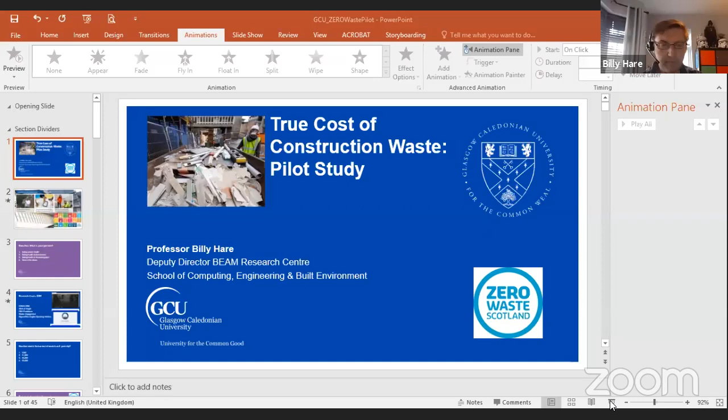Thank you, David, and thank you for that introduction. As David has mentioned, I'm an academic from Glasgow Caledonian University, and I want to speak to you today regarding research that I did just before the pandemic-induced lockdown. It completed just around about January, February this year, and it relates to - if I just share my screen and bring up the PowerPoint presentation for you - it relates to something around construction waste, and it was researched to try and do an update study of the true cost of materials wastage in construction projects.

Now, some of you on the call today may know me from my more substantive research area, which David alluded to there, which is on the management of health and safety risks, which I'll say a little more about in a moment. But for today, this is just another area of interest to me, which has been for a number of years, but I don't get the time to do as much research and other work in this area - the reduction of construction materials wastage on construction projects.

So as David says, I work as an academic at Glasgow Caledonian University. I'm Deputy Director of what's called the BEAM Research Centre. That stands for Built Environment and Asset Management Research Centre. And that's within the School of Computing, Engineering and Built Environment.

Now, the webinar today is billed as, I think, something along the lines of improving your waste management on construction projects. But just to be clear, what I want to report today is on this project regarding how we went about identifying the true cost of construction waste. But along the way, I've applied a little bit of my health and safety insights. And the phrase that I like to use is identifying the root cause of the waste rather than just managing the waste as it arrives in the skip. I'll say a little bit more about that later.

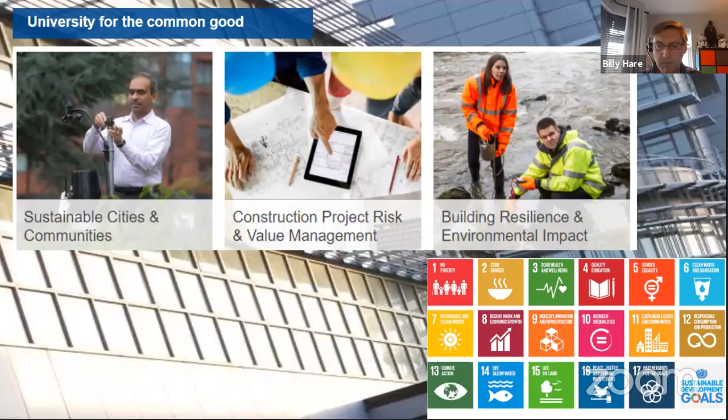Which SDG do you and your research talk to? I can tell you off the top of my head immediately that sustainable goal number 3, good health and well-being, which is the health side of health and safety, and goal number 8, decent work and economic growth. Decent work includes safe work, so there you go. Number 8 and number 3, that's our health and safety. But as I said, today I'm not saying too much about that work. We're looking at what might be termed under goal number 12, responsible consumption and production.

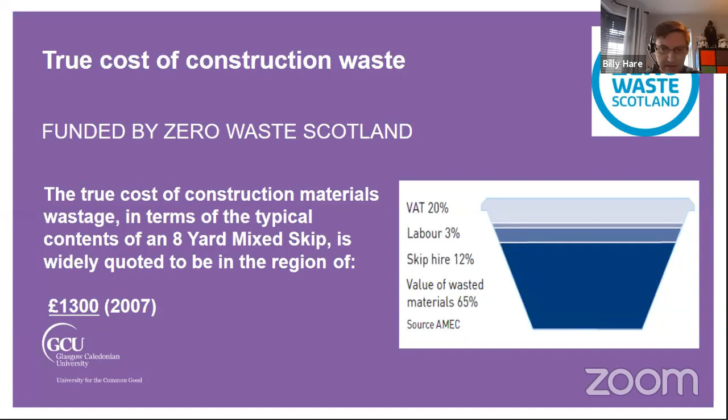The date is significant, isn't it - it's just prior to the 2008 global recession, and we've had various things happen in between. So we were asked, is it still the case? Is it still 65% the purchase value of the waste - what you as a contractor paid for it - the skip hire cost being 12%, the labour cost to put the waste in the skip, and VAT at 20%. Although when this work was done in 2007, I'm sure the VAT level was 15 or 17.5%, so there's been some variation in the VAT figure as well.

So some waste tools I came across doing this research, just for your information if you're not already aware of them. The BRE SmartWaste Tool is probably the most well known, and there's a link to it. What I find with it though, if you talk in health and safety terms, is that it's very much looking at the scene of the accident and doesn't do too much, in my opinion, to backtrack through the causation or the incident of waste going in the skip. The causation model doesn't feature too much in it. I may be wrong because I've not seen more recent versions, which you have to subscribe to see, so it may have been updated since I last looked at it.

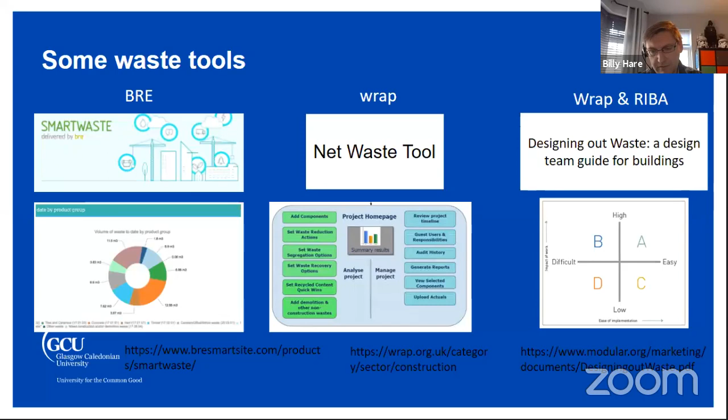WRAP also have the Net Waste Tool, although when I looked at it recently I couldn't find the tool - I'm not sure if it still exists in that format, but there's plenty of guidance on that as well. WRAP, in conjunction with RIBA, have also produced not so much a tool but a working method for designers to design out waste from the start, using techniques such as the one on the screen there - is it high impact, is it low difficulty, then that's an easy one to implement; if it's high impact but difficult to implement, it might be more or less achievable. So tools like that and others are in that guide, and the links are there for your information.

But my take on this is that they've not really looked at it like site waste management plans do. They look at the waste as it arises, but to what extent do they go beyond that to the reasons why the waste is produced? And that's where I've got the title there: Find the Root Cause of the Waste.

We wanted to also update that figure of £1,300, which incidentally was based on one site, one skip, in 2007 - so it's not exactly a large database or large sample to take it from. We have, in fact, undertaken the work that I'm going to show you today as a pilot study, but using 3 sites, so that's already 3 times the sample size of the original work. The other thing I want to show you is the methods that were used as well.

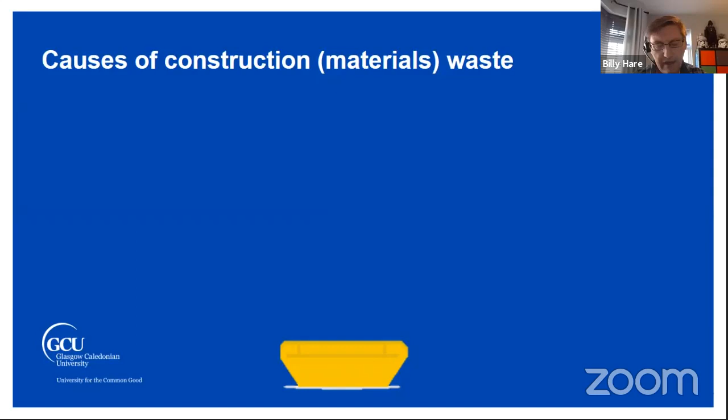So what I've got here is just a summary of those root cause factors that might result in waste being in the skip. So you might have design and client influence - I won't go through every one of them, but things like buildability issues or the client changing their minds.

It wouldn't be the first time when I worked on construction sites where we had to pull down a blockwork wall because the client changed their mind about its position. So unless you find out the source of that, how can you improve matters?

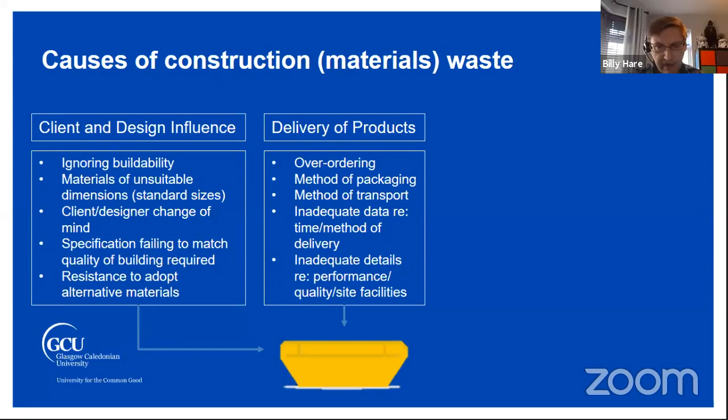We then got to things like delivery or procurement issues, such as possibly over-ordering. From a site-based background, it's always better to have too much than too little, but that's another factor that can result in waste in the skip, as well as transportation issues and other issues around packaging. Then eventually you get to site management practices, such as poor storage and transportation within the site that might result in breakages, damages, or losses.

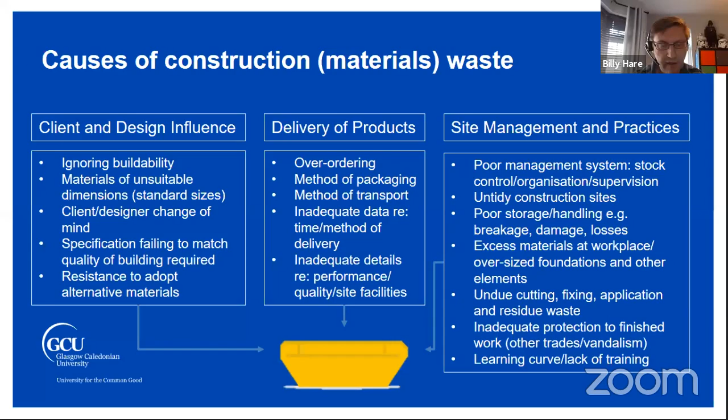So these are all things that are important in trying to track down the source of why your waste is in the skip. For the work we did, I employed a researcher, funded to have quite a boring existence on the site at the skip, logging all the information. They had a tablet we purchased, and we used a very simple spreadsheet with drop-down lists for various options, which I'll come to in a moment.

The researcher was permanently on site for sites 1 and 3, because the skips in those sites - 8-yard mixed waste skips - filled up quite quickly. On site 2, it took far longer to fill the skip, which will become evident when we look at the data, so there were intermittent visits from the researcher.

We had to consider risk assessment and safety issues, so the researcher had site inductions. I specifically asked that we did not have sites that incorporated a chute system, for fear of being struck by items from above. We did accept sites using forklifts to load the skip, because we had an experienced researcher who'd worked on construction sites.

On one of the sites, we also used a GoPro camera to test how useful a camera could be to collect this data, rather than just someone standing at the skip on a permanent basis.

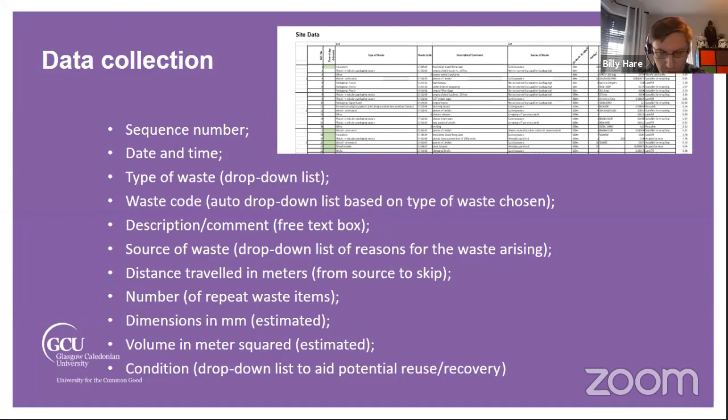We had, again, a drop-down list with definitions, such as good as new, right down to useless, put it in landfill. Here are just some examples of those drop-down lists that I thought you might find interesting.

That's typical of the construction waste definitions: insulation, concrete, bricks, along with their code, which comes up automatically when you choose that option in the drop-down.

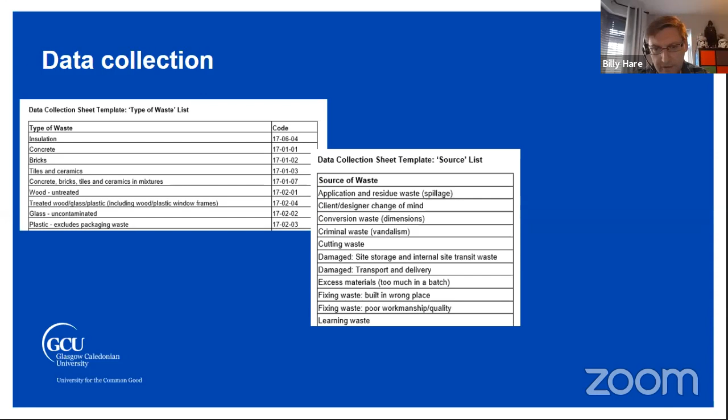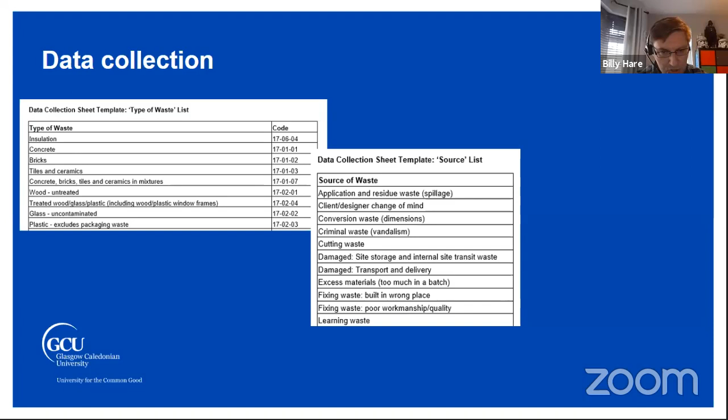The all-important source - things like cutting waste, damage, learning waste if it's a new product - these are all things here. But as I say, I want to manage your expectations: very few of these were identified, and it was basically a low-level assessment of why the waste has arisen. But even that is refreshing compared to what would normally happen, which would be identifying which subcontractor produced the waste and just bashing the subcontractor until they had less waste.

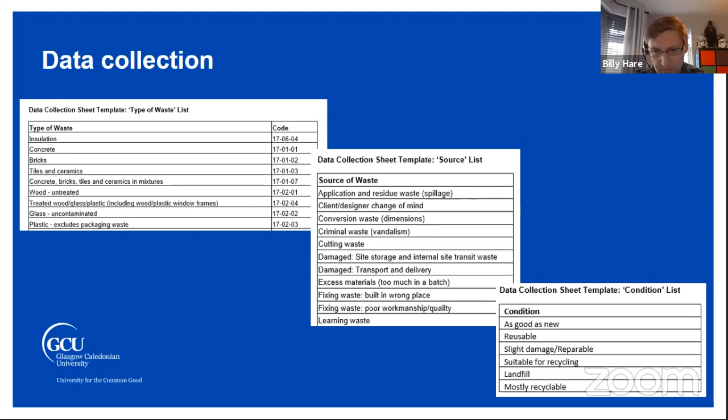The last one there was that condition, and there were definitions of what as good as new meant, what reusable meant, slightly damaged, or put it to landfill, for example.

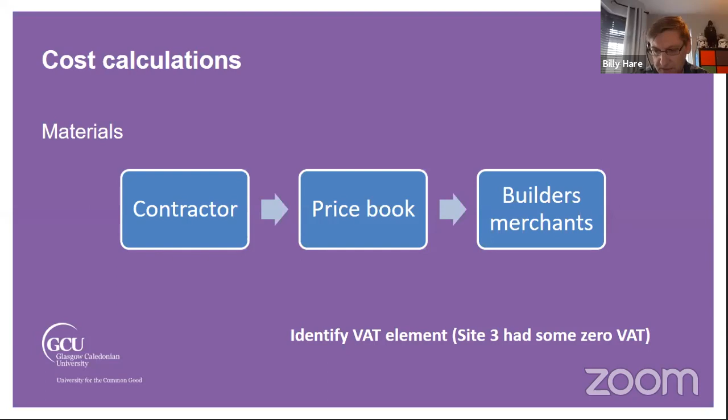In terms of the cost calculations, we got costs in some occasions from the contractor, what they had purchased the materials for. If we didn't have that, we would go to a typical price book, such as Spons, or the last option was maybe builders' merchants' cost information. In one of the sites, we had zero VAT because it was a house building site, which I'll come to more information on in a moment.

To calculate the labour costs, we had the hourly rates and the average time. We researched how long it would take to carry the waste to the skip, which we calculated to be on average 3 kilometres per hour, 2 kilometres in a hoist, and 8 kilometres in a forklift. That equates to roughly 5 miles an hour, which is the typical forklift speed limit on a site.

We also identified what it might cost to fix problems. When things go wrong, the reason the waste is in the skip might be that it was installed incorrectly or was damaged, so there was a cost allocated to fixing that problem. We also had, on some occasions, wrongly specified materials chucked in the skip, which has cost implications as well.

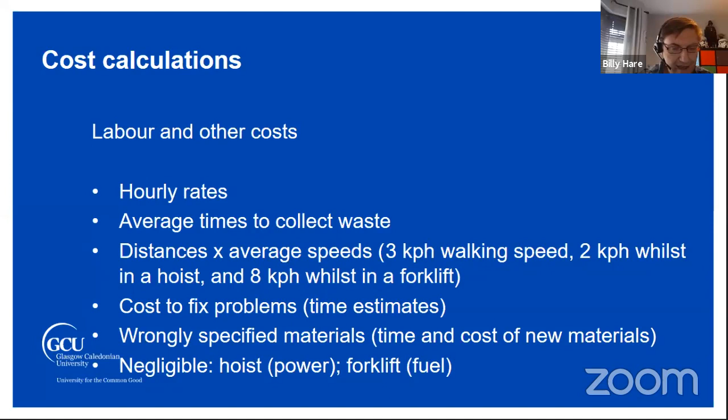Other things we identified but were negligible were the power for the hoist and the fuel for the forklift. We did not include the hire costs for the hoist and forklift because we decided you need that equipment whether you're producing the waste or not.

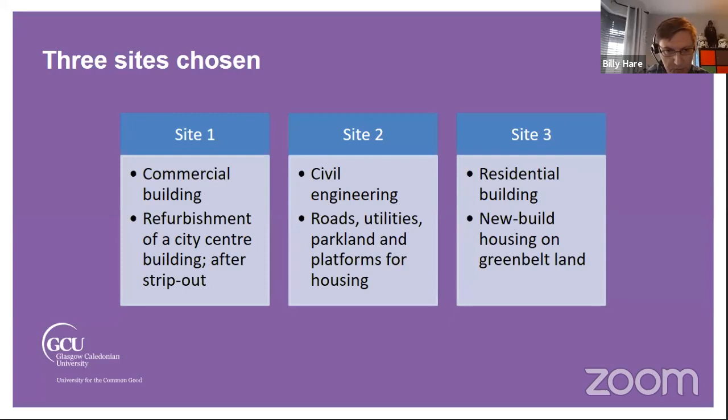The 3 sites were basically a commercial building site, a refurbishment, a civil engineering site, and a new build housing site on Greenbelt. These were specifically chosen from the various options we had, so we had a good mix of different types of site. Site 1 included the use of the GoPro camera.

We also approached some site waste management contractors because we thought we could possibly tip one of the skips out at the waste transfer station and collect the data that way. That might have been a more cost-effective method, but after 3 attempts at 3 different waste contractors, we gave up because they were too interested in productivity and could not, even with a £1,000 incentive, give us enough time to analyse the waste as it came from the site into the waste transfer station. That tells you a little bit about the priorities of our waste management sector here in Scotland.

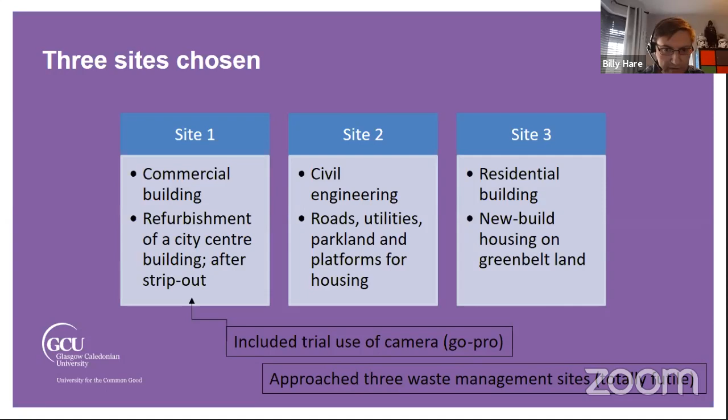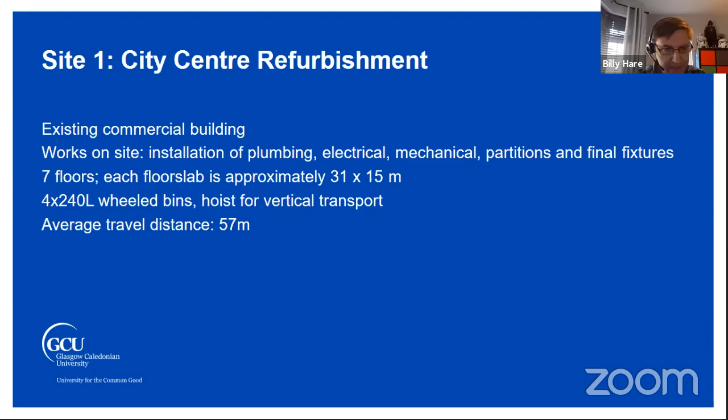So let's look at the results. Site 1 was a city centre refurbishment. There's some information on that. A soft strip had already been undertaken, but there were still elements being stripped out as the new plasterboard, fixings, and partitions were being installed. 7 floors, 4 240-litre wheelie bins using the hoist to transport waste down to the skip.

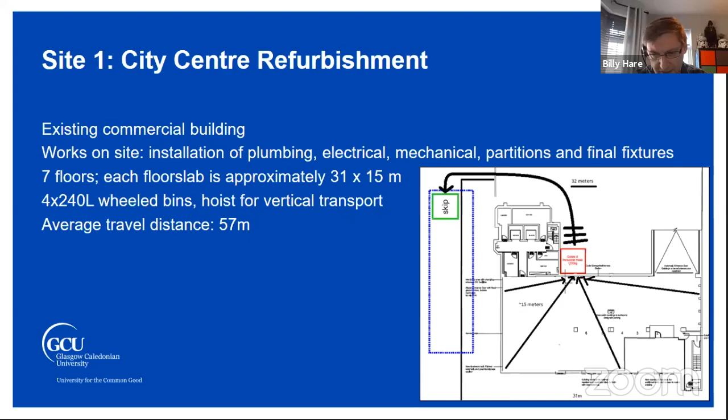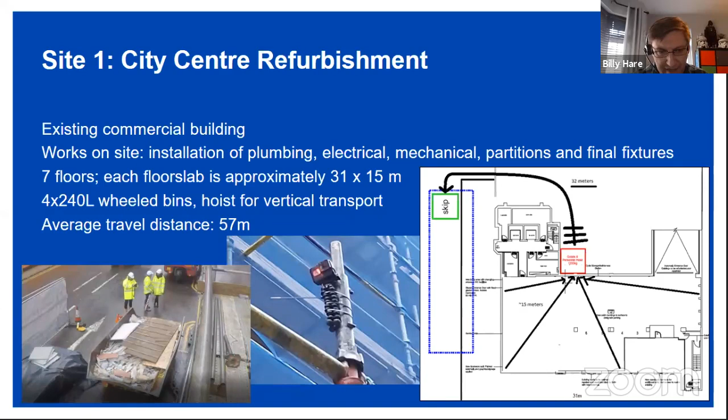On the slide there's a draft drawing by the researcher identifying a typical floor slab and the route taken to the skip, which is on the left-hand side. The GoPro camera was on the scaffold across from the skip, and that's the picture of the skip there, which has been analysed. This was filled within half a day, a very fast-moving site, which gave us data really quickly.

The waste was calculated in terms of volumes. Based on the type of work being done, the greatest amount of waste came from offcuts of plasterboard. The demolition waste was mostly other types of plasterboard and timber. Timber accounted for 14% of the waste, and metals 10%.

When we put the purchase cost against that using our method, it was £343 worth of plasterboard that was offcut. Timber, £519, and metals, £43. So total purchase cost of £905.

When you add on the other costs, the labour costs and the skip hire, there was a permit cost as well. That came out at approximately £1,351, which was almost bang on the current figure of £1,300.

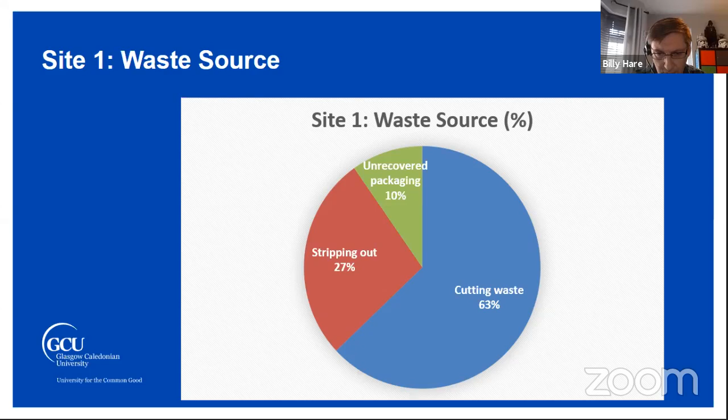Then you start to look at the waste source. So what is the waste source? The cutting waste was accountable for 63% of the waste in the skip, mostly plasterboard, but also some of the timber and metals were down to cutting waste.

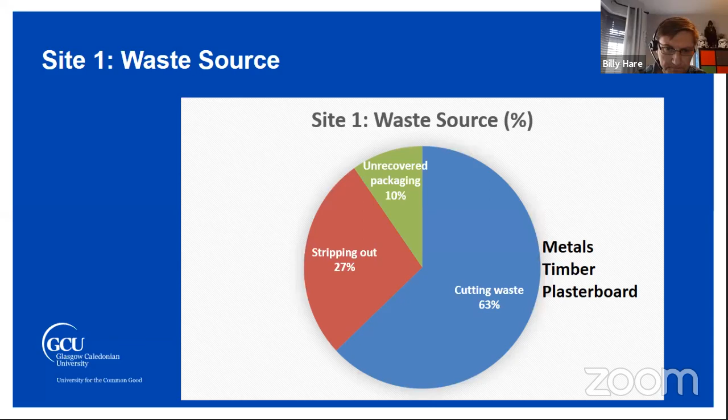When looking at possible solutions, we said to the contractor they might want to consider things like digital scanning, the use of digital technologies, and even prefabrication. I can appreciate that for an existing building this is difficult, but digital scanning these days can allow more accurate assessments of dimensions, and standardization of dimensions is key to reducing the amount of cutting waste. That's just one example of how we assisted with that particular site.

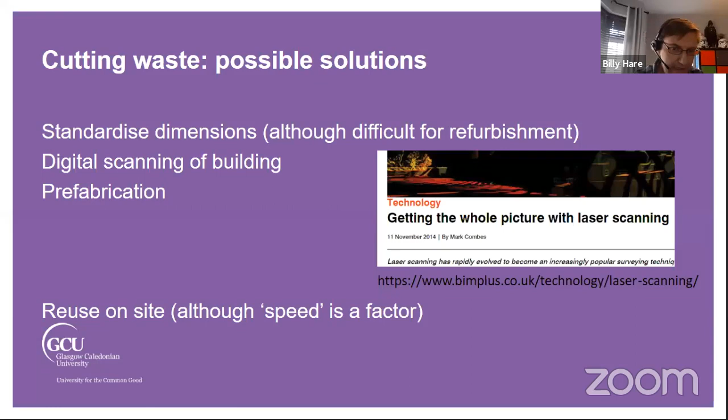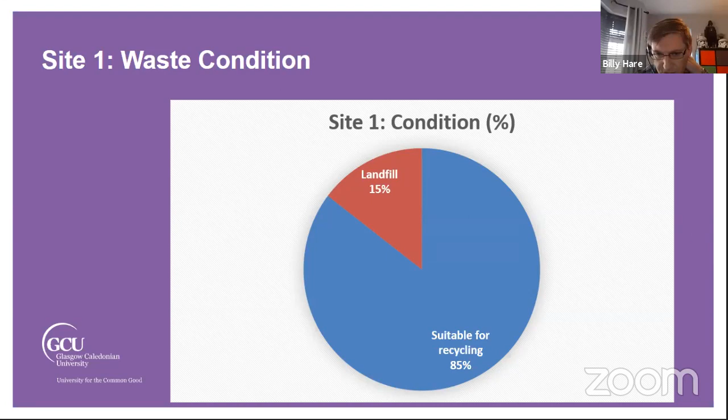The waste condition analysis found that most of the waste was suitable for recycling. We don't know what happened to the skip once it goes to the waste contractor's transfer station, so possibly it was recycled, but with a mixed waste skip, we are unsure what's happening with that waste. We identified that 15%, mostly contaminated or unsuitable for recycling, was in that skip. So there was large scope for recycling in that particular skip.

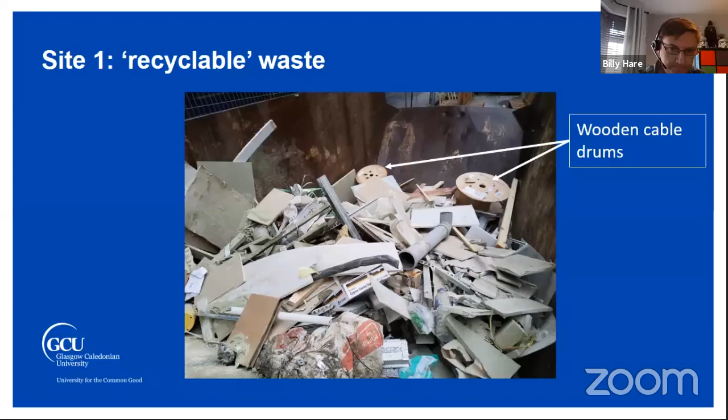So you really need someone there on the site.

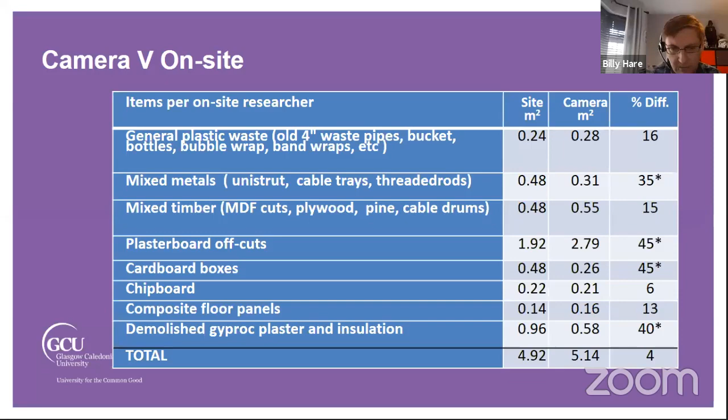If I move to site 2, this was a civil engineering site, a very large site, mostly groundworks going on, and not much call for mixed waste going into the mixed waste skip. There was a forklift in operation. We also had a dedicated supervisor at the waste compound, and there were 4 segregation skips.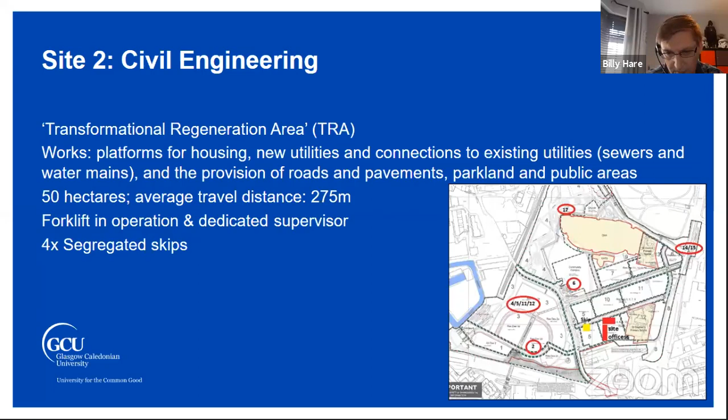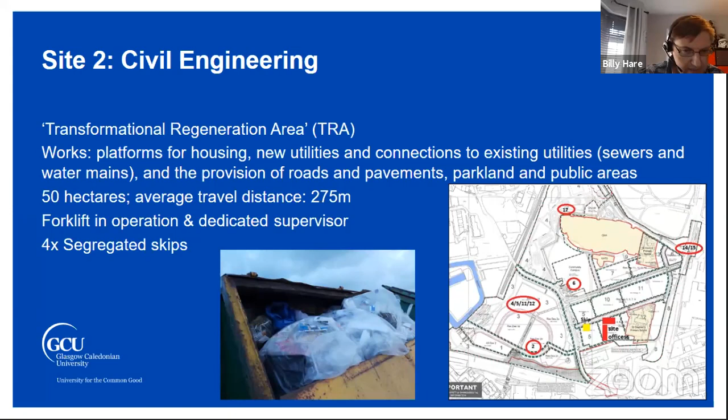As it turned out, the main amount of waste going into this skip for the civil engineering contractor was actually from the welfare units. The layout of the site shows the site offices in red and the skip compound in yellow, with the red circle showing the areas where the waste was coming from, but the vast majority was coming from the site welfare facility. As you can see from the photograph, the majority of the waste in the skip was from plastic bags, so although it was mixed waste, it was mostly from the welfare facility, reflected in the pie chart.

The welfare waste was 91%. There was other stuff such as expanding foam, something I've called office waste, which included a laptop bag and drawings discarded in the skip, and an element of packaging, although some of that packaging was the type that could be reused, it was put in the skip anyway.

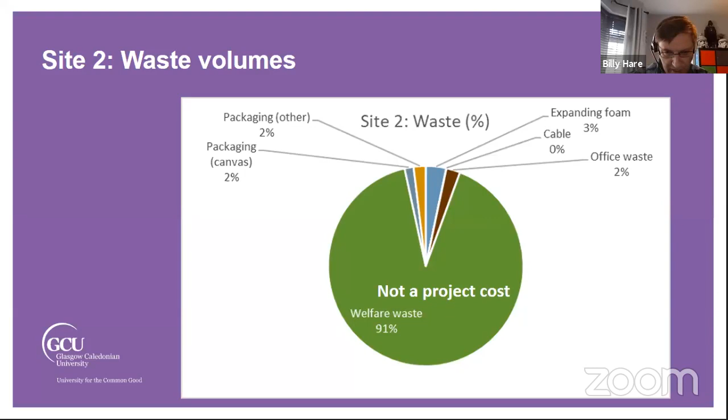The welfare waste we decided was not a project cost, so things like empty cans and crisp packets were not purchased by the contractor, so we didn't consider it project waste. The office waste we did, and we put prices on that, and the expanding foam and some of the packaging that could have been reused was included there. So a rather smaller figure in terms of materials cost of £331.

What I will say also is that the supervisor saved in the region of about £240 worth of waste going to the mixed skip by removing it from the mixed waste skip and putting it into the segregated skips. So this was mostly timber, plastic and packaging.

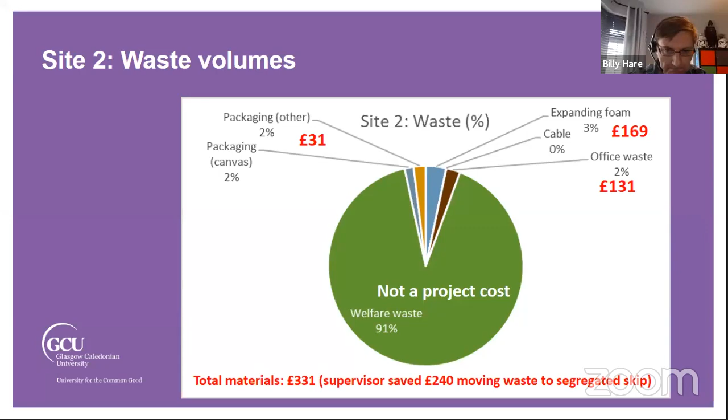That's just some photos of that, the actual supervisor amongst the skip taking out things that could go into the other skips. So things like the plastic ducting in the top left-hand corner, although it was in the skip at the time of the photograph, it was not in the skip by the end of the day. So we decided that for the purposes of our project, since it's not in the skip at the end of the day, we did not count it as wastage because it was going in some way into the other recycling skip and would be recycled.

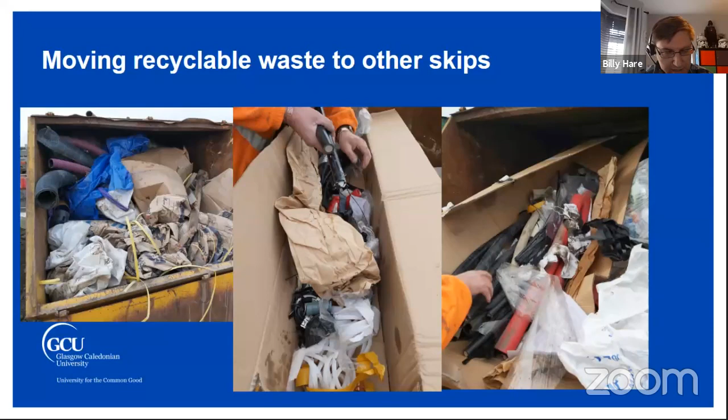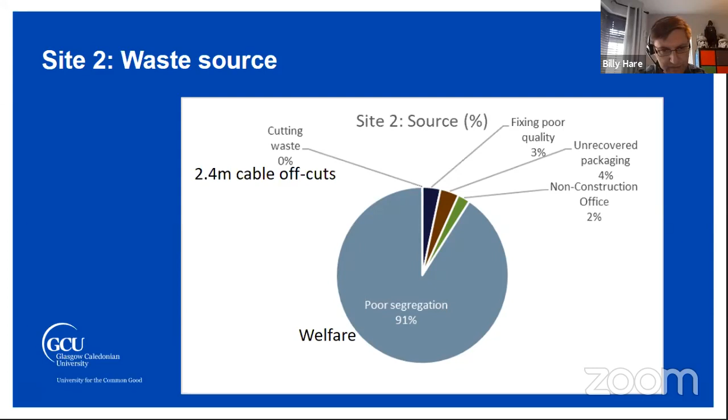So the poor segregation of welfare waste is at 91%. The cutting waste was from cable offcuts, so the same issue of offcuts. And the poor fixing quality came from expanding foam, which was used to plug gaps in shuttering. The shuttering had been damaged and the groundwork contractors had used the expanding foam to plug those gaps, and then it ends up in the skip.

You could look at that different ways. It could be seen as a necessary waste from the temporary works. But if the method of formwork, or the quality of the formwork shuttering, had been better, then you would not have needed that expanding foam. So it identifies a potential issue there that could be resolved for future concreting works.

There's a very small amount of packaging here, down to the supervisor moving that out of the mixed waste skip and into the designated segregation skip.

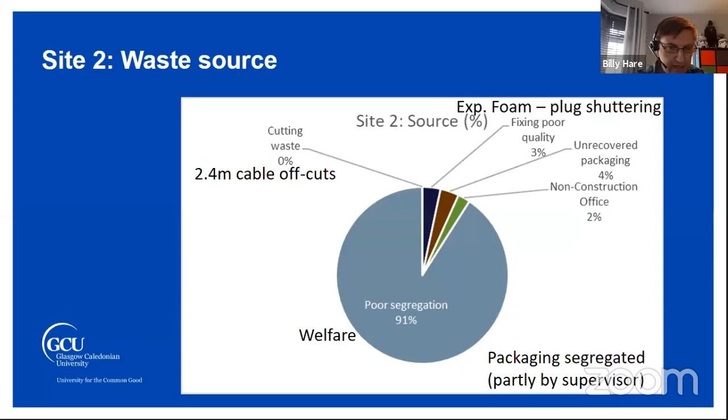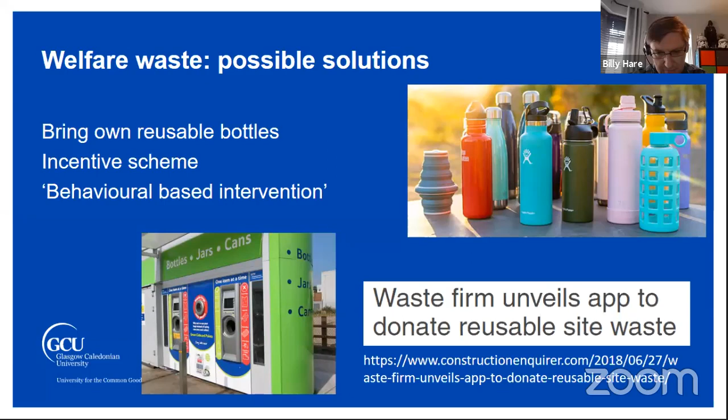In terms of possible solutions, things we've seen from other contractors is bring your own bottles to work, or actually installing a facility on site for cans and bottles, plastic and metal, as well as plastic bottles. So that was something we identified for that particular site.

For the condition of the waste, we introduced a new classification, mostly recyclable. So what we were saying there is about 90% of the contents of the plastic bags from the welfare waste was recyclable, either through cans or bottles.

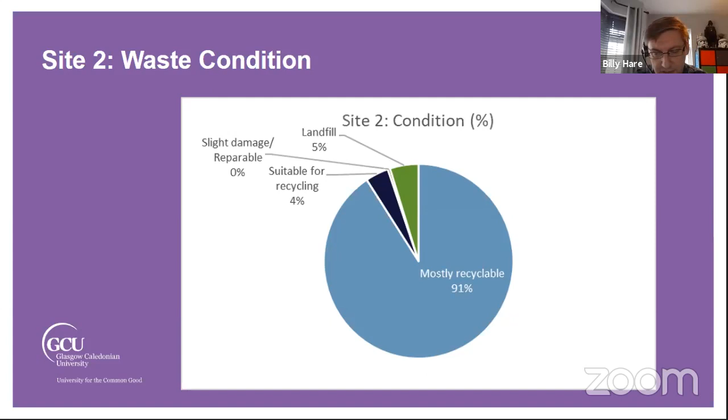We did a quick calculation on what you would get in terms of money for those plastic and metal cans and bottles, and it worked out to be in the region of about £57. Not a great amount, but I think the bigger issue here is 90%, over 90%, of the mixed waste skip is welfare waste that could be avoided, and the contractor is paying for that skip to be on site.

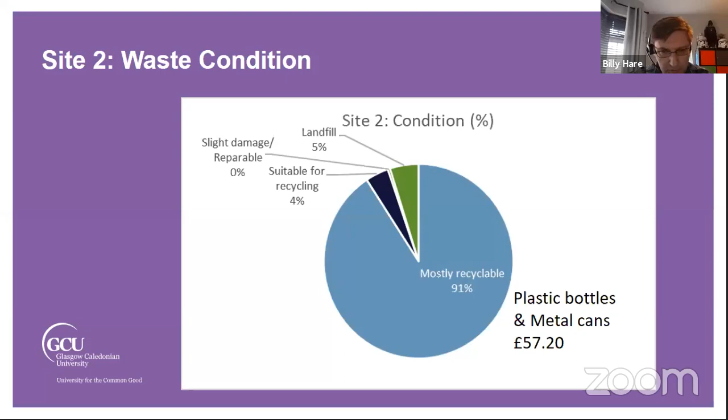Therefore, either the skip could be used for a longer period of time, or could maybe even not be required at all. Now, I'm keen to get to site 3, because this is the one where the actual source analysis was extremely useful.

This was probably the most useful site because of the amount of waste. I don't want that to be a commentary on how wasteful house builders are, but from this house builder, we got a lot of waste.

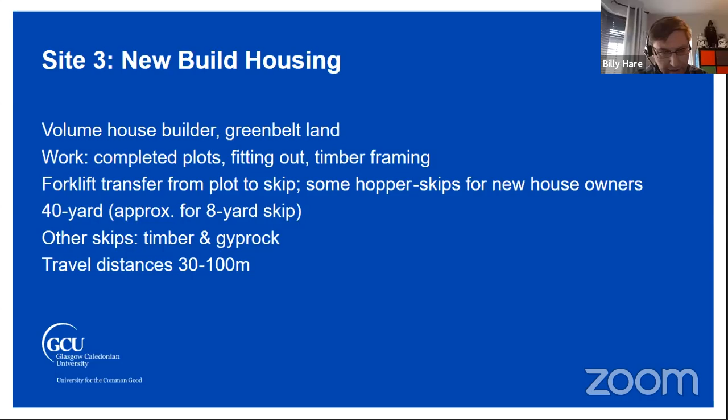Unfortunately there was not an 8-yard mixed waste skip on site. They used 40-yard skips, which were fed by small hopper skips from the various housing plots. So we calculated how many hopper skips would equate to an 8-yard skip, which was somewhere in the region of 7 or 8 hopper skips, and we therefore analysed the data from 8 hopper skips.

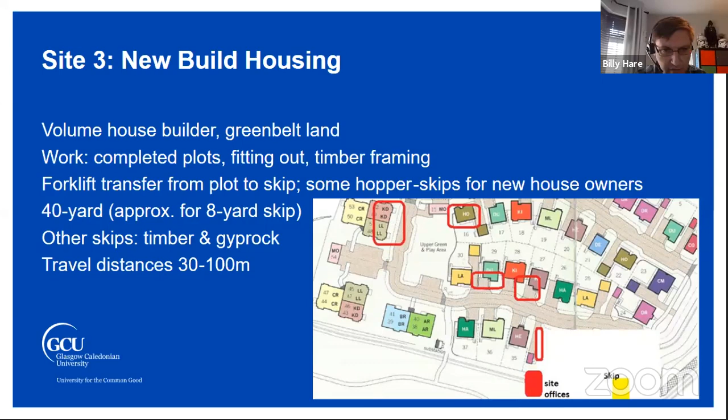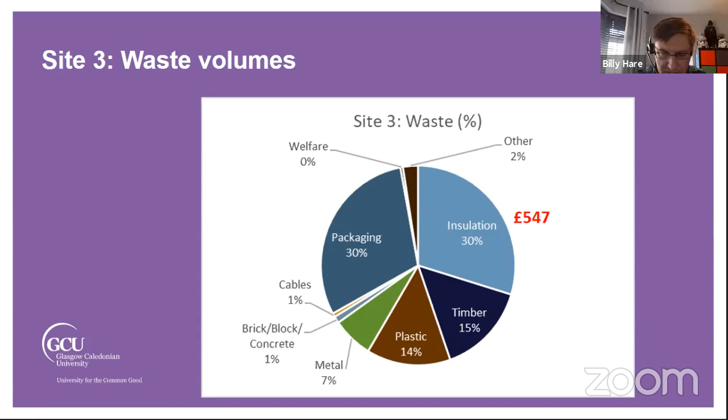In terms of the actual waste, about 30% was insulation waste - this was Kingspan solid insulation, in the region of £547 of purchase cost to the house builder. Timber was in the region of £226, plastic for typical domestic house dwellings was £200, and metal to the value of about £120. There were also lots of other individual items, too many to put in the pie chart, of extremely obscure items in the skips that we'll come to in a moment.

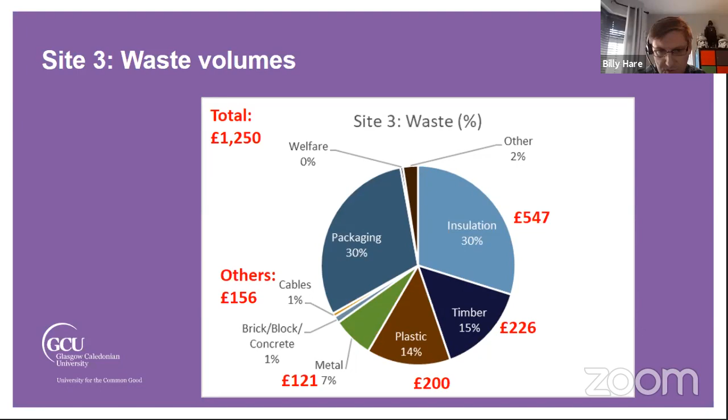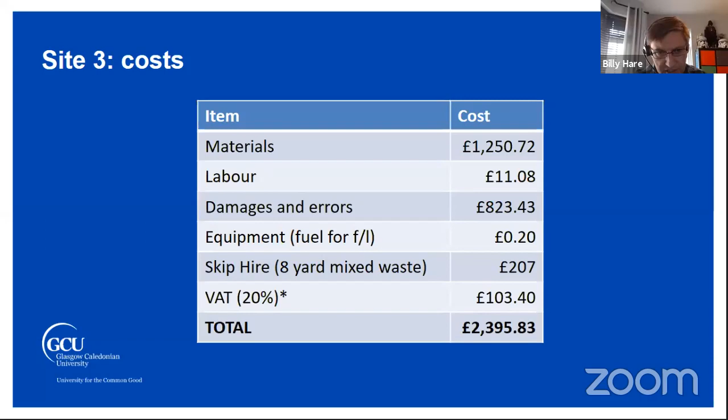So the total here, the greatest cost to the house builder, was £1,200 worth of purchase cost of materials in the skip. Once we add on our damage and errors, which is a substantial amount that I'll come to in a moment, the true cost to Site 3 was in the region of nearly £2,500.

When we look at the source, the reason for this waste being in the skip, we've got cutting waste again - timber, metal, plastic, and insulation - but there was also quite a number of damaged items. Again, the majority of the insulation was in the skip because it had been damaged. Metal barriers had been damaged, and even a broomstick that had been damaged.

Now, I know 'ban the broom' is a phrase that's used a lot in construction these days, but that's taking it too far, I think.

Wrongly specified items as well. These included door stops, packers, plastic packers, and latex gloves, which I assume were deemed not suitable for the workforce. So these are things that are being chucked in the skip unused because they've been wrongly specified.

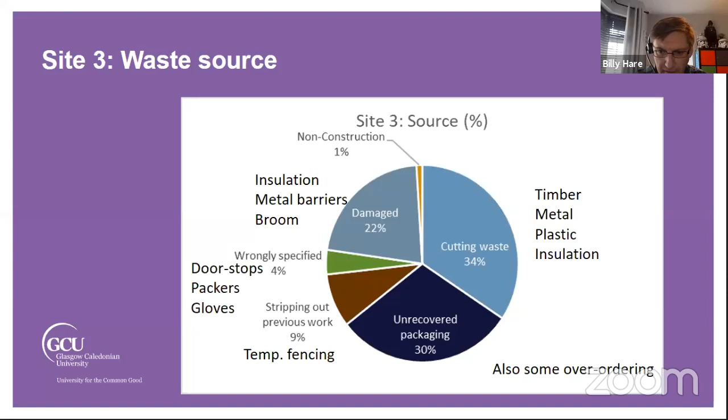We also had temporary fencing. Now, you could call this temporary works, you could call it prelims. Fencing that house builders tend to put up to look pretty, but also fence off phases of the work, and essentially serves no purpose after the work is done and ends up in the skip, which I thought was rather wasteful as well. There was some over-ordering too, a small amount too small to put on the pie chart.

These are lost opportunities to prevent the waste. So there's an example of the Kingspan that's been chucked in the skip because it's been damaged. In the background of that image are the fence panels, or the barriers, metal and plastic barriers damaged by vehicles, probably the forklift. And then this is fencing that was in perfectly good order, but then no longer required, and chucked in the mixed skip, even though there was a timber skip available as well.

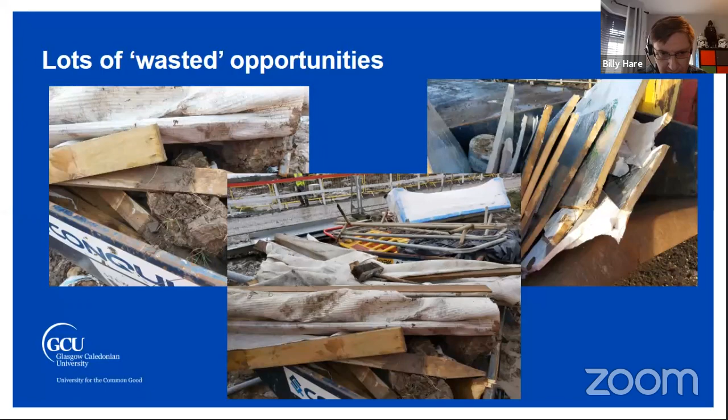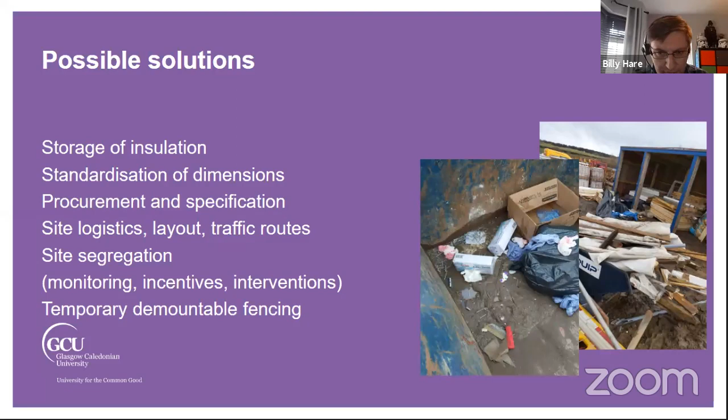So in terms of possible solutions here, there's an image of the storage area, which looks fine for the Kingspan insulation, but obviously something's happening between the storage and the installation, where it's been left out and damaged during transportation. That's boxes of latex gloves, unused, put in the skip.

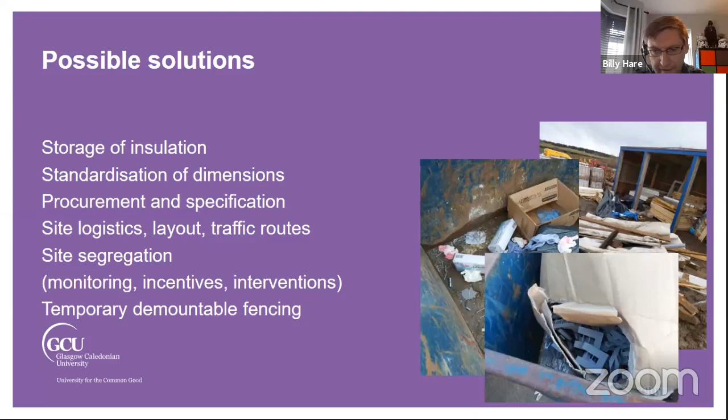And here's the packers that were then unused as well. I don't have a picture of the door stops, but when I worked on site, if I saw something like a box of door stops - I think they were brass or metal anyway, high quality - they went in the skip. I would have probably taken those home just because I couldn't face something like that going in the skip.

Also the issue of temporary fencing and structures that end up in the skip. I've learnt a lot from the sporting and entertainment industry in terms of temporary demountable structures, which can be grounded down so they don't blow over in the wind, and they're sturdy enough that they can be reused time after time. I don't know why house builders don't investigate that as an option.

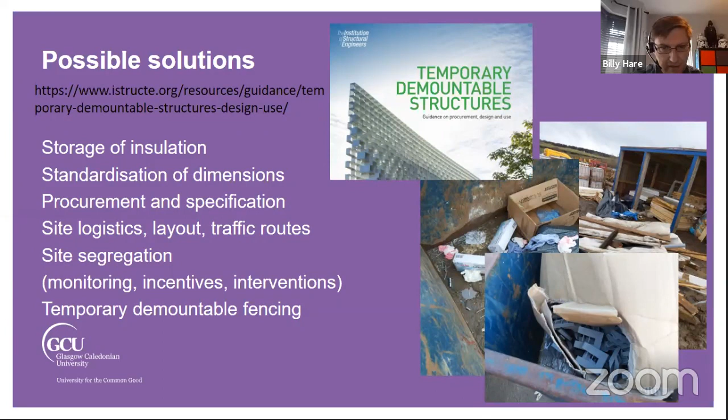So lots of opportunities there for improvement. The waste conditions, in terms of stuff going to landfill, is mostly because it was contaminated - it had been damaged or contaminated. Wrongly specified items were as good as new, so that could have been used elsewhere. And there were other small items like debris netting, roofing felt, and concrete blocks that were completely reusable but went in the skip as well, and suitable for recycling.

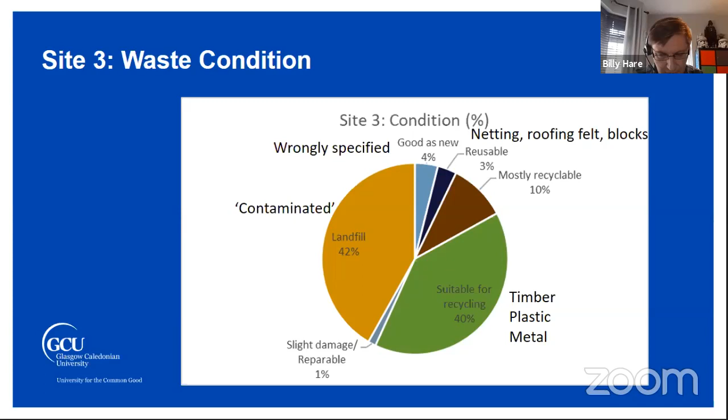Items such as timber, plastic, and metal - there were skips for these items, but they weren't placed in the skip.

I'm coming to the end, just nearly finished. So just to give you, again, the focus of the work was the average cost of waste in an 8-yard skip. So first of all, we've worked out a figure per cubic metre of waste, which was in the region of £375.

The overall purchase cost of materials in the skip worked out over the 3 sites to be about 830, which is down on the previous figure from 2007. That might indicate either a drop in purchase prices or possibly improvements in efficiencies. The average labour cost was virtually the same, showing not much change in labour costs.

And this was new - not included in the 2007 figure - a separate cost figure for fixing errors or replacing wrongly specified materials. That's where that comes from. On average, across the 3 sites, we worked it out to be 281.

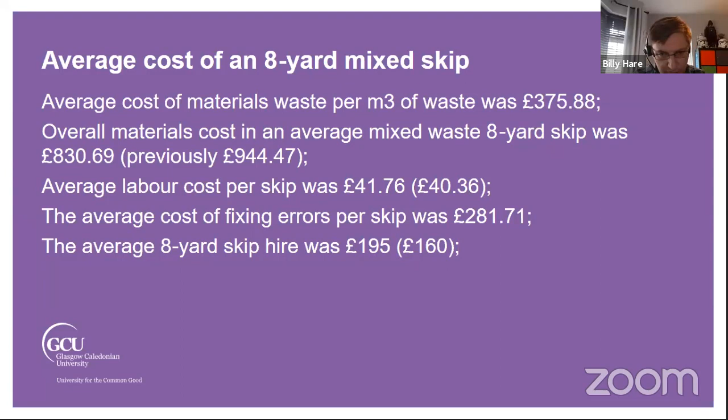And then the actual hire cost of the skip on average has gone up from 160 to 195, and the VAT working out at 269. So here is what we might call the new figure of the average cost of an 8-yard skip, which is, albeit based on Scottish sites - we could apply it to the rest of the UK, I'm sure - at 1618.99, but let's round it up and call it 1619.

So you've heard it here first - that's the up-to-date figure, based on 3 times the number of sites, of the true cost of waste in your skip.

Looking ahead then, Zero Waste Scotland were due to fund us to do a larger scale study in Scotland, more sites with more data. That's been put on hold for obvious reasons. But I'm willing to, if any partners are interested in the work I've presented today, look across the UK to apply it on other sites.

You might find it useful. We could also create something in terms of digitizing the process with an app, which I've done a few things, as I've said in previous, with my IOSH research. In terms of using this method, it could be used at the beginning of a long-term program of work, for diagnostic purposes on problem sites, or for benchmarking purposes for process improvement.

So just to see if you were listening, another quick quiz. What was that figure again? What was the new figure for the true cost of waste? There's options going from 1300 to 1619. I'll give you a minute to get that in. I'll give you it verbally because we want to finish by about 2:15. If you remember correctly, it was 1619, option number 5, and I'm sure we'll see confirmation of that in just a moment.

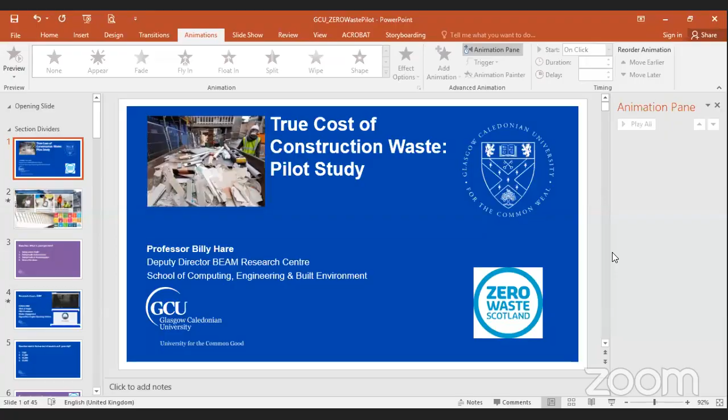Yeah, I think from a site management perspective, speaking as someone who did work on site, sometimes there's a balance between having to get the work done in a timely fashion and what you do with this waste - you can't have it hanging around. Particularly that example was the busy city centre site where time is of premium as well as space. So you're faced with an option, and of course there's intermediaries who can deal with that, take it from the city centre and deal with it in another location.

The thrust of what I'm trying to get across is, if you look at the source, why it's in there. There needs to be maybe another few layers of questioning, a bit like accident investigation - 3, 4, or 5 times asking why is it there? Why did it need to get in the skip? Why is it not being picked up by the supplier and reused? That's really where you get to eventually answering some of the questions that will reduce the waste.